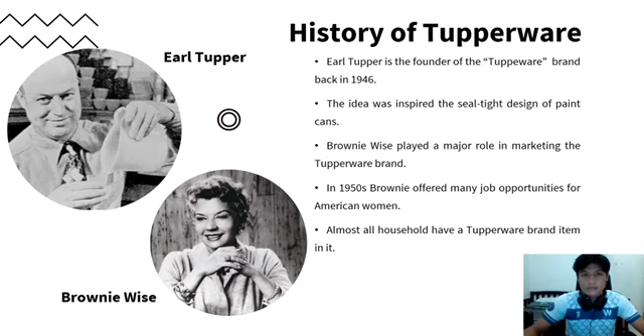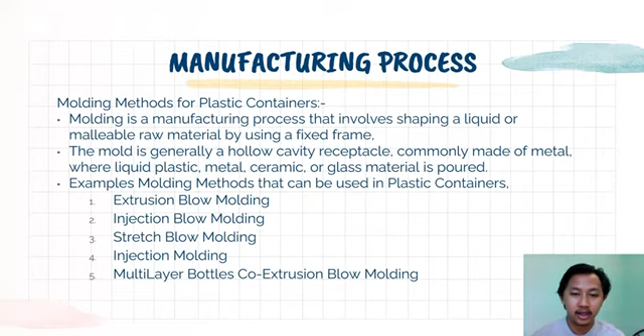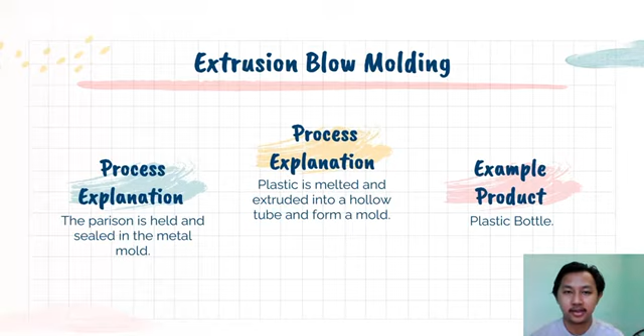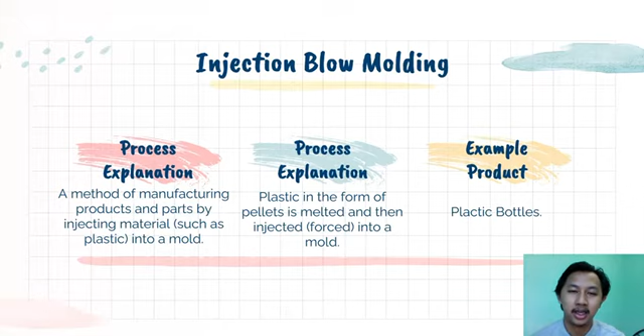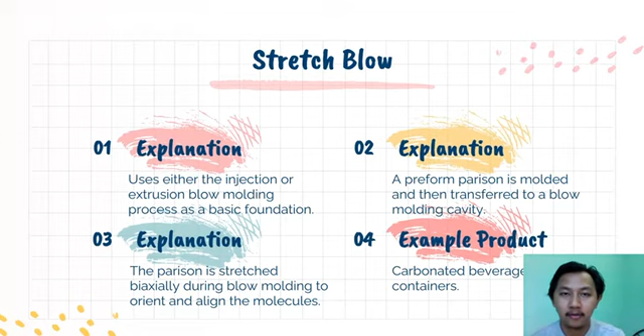Next, stretch blow molding uses either the injection or extrusion blow molding process as a basic foundation. A preformed parison is molded and then transferred into a blow molding cavity. The parison is stretched biaxially during the blow molding to orient and align the molecules. The example product that can be made from this process is a carbonated beverage container. This is the process procedure and example machine. What we can see is the process procedure is similar to extrusion and injection molding.

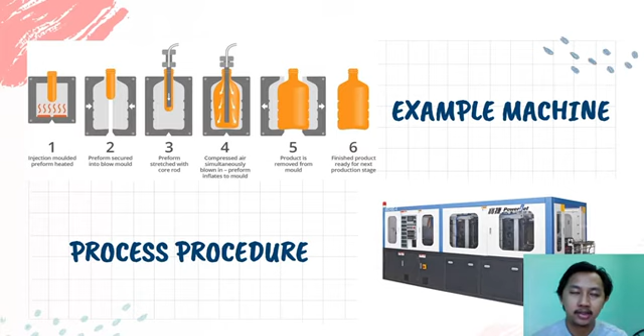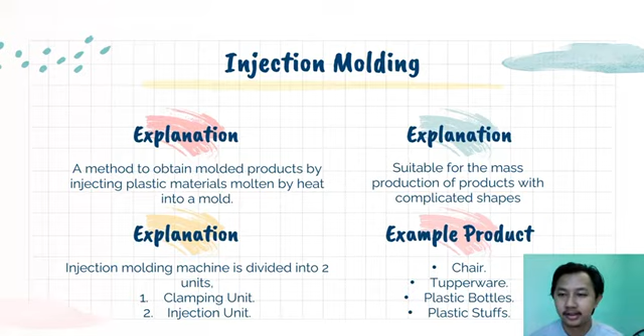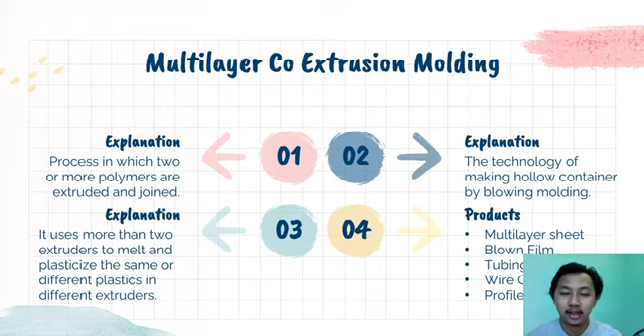So basically, for the conclusion from the manufacturing process, we can see injection molding is the good or suitable process that we should use in making the Tupperware.

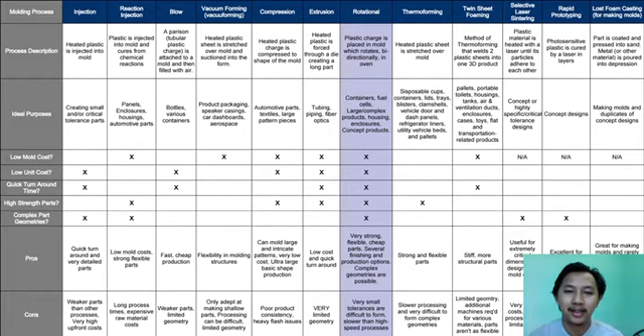Before I end my presentation, this is the comparison regarding all the molding processes. Each process has pros and cons, but we as future engineers must know the pros and cons, so we will get ready about the product that we want to make.

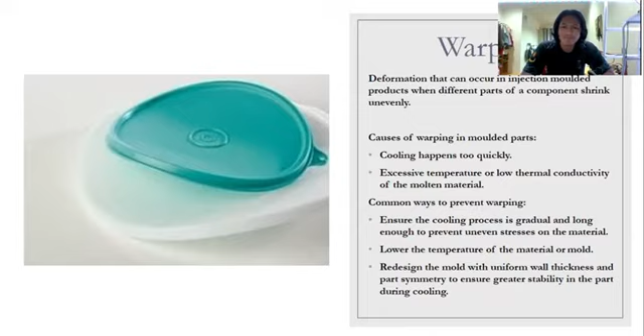So the next defect is sink mark. Sink marks are depressions in an otherwise flat and consistent surface of the molded part that occur when the inner part of the molded component shrinks from outside inward. The main cause is the material cooling too slowly, and shrinkage pulling the outside material inward before it had a chance to adequately cool.

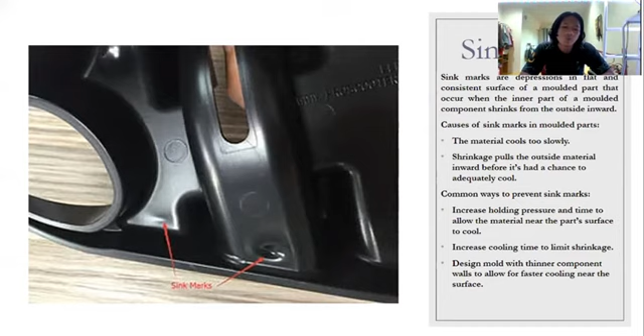The best way to prevent sink mark is by increasing the holding pressure and time to allow the material near the part surface to cool. Next, increase cooling time to limit shrinkage. Lastly, design the mold with thinner component walls to allow for faster cooling near the surface.

The third defect is flash. Flash is excess molding material that appears as a thin lip at the edge of the component, which appears due to material flowing outside of the intended flow channel. The cause of flash is a poorly designed or worn and degraded mold, and excessively high mold temperature or injection pressure.

How to prevent flash: retool or redesign the mold if the plates do not fit together properly or allow material to flow outside the channel. Increase plate clamping force to confine material flow to the channel. Lastly, adjust mold temperature, injection pressure, and ventilation to improve material flow.

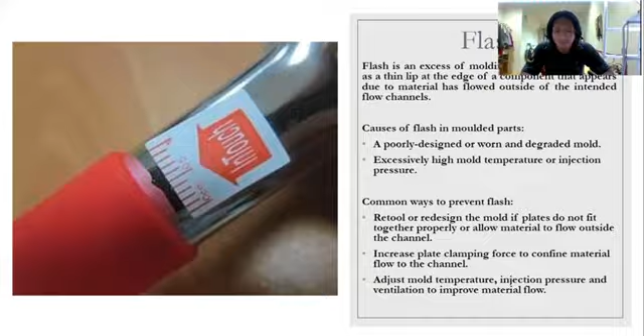Next is delamination, which is a thin layer on the surface of the molded part that easily separates or peels off the underlying material. The cause of delamination is flaky separation that results when two materials cannot properly bond to each other.

Excess moisture on the material due to improper drying prior to use can also cause delamination. The best way to prevent delamination is by increasing the mold temperature or pre-drying the material properly if excess moisture is an issue. Next, ensure workers are properly storing and handling the resin pellets or base material to prevent contamination. Lastly, consider redesigning the mold with a focus on the injection nozzle to limit your dependence on release agents.

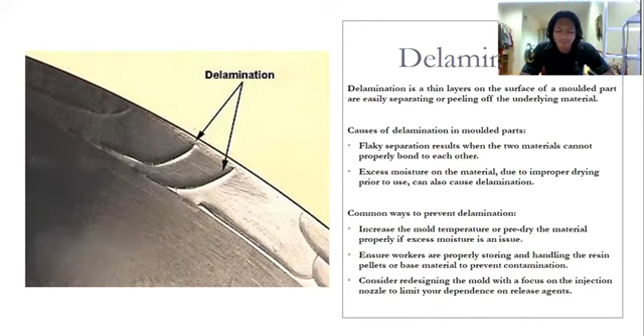The last defect that can occur during injection molding is vacuum void. Vacuum void is a trapped air bubble that appears in the finished molded component. The main cause of vacuum void is inadequate molding pressure to force trapped air out of the mold cavity.

The material may be vulnerable to void if the density changes significantly from the molten to hardened state. The best way to prevent vacuum void is to raise the injection pressure to force out the trapped air bubble. Next, choose a grade of material with lower viscosity to limit the risk of air bubble forming. Lastly, place the gate close to the thickest part of the mold to prevent premature cooling where the material is most vulnerable to void.

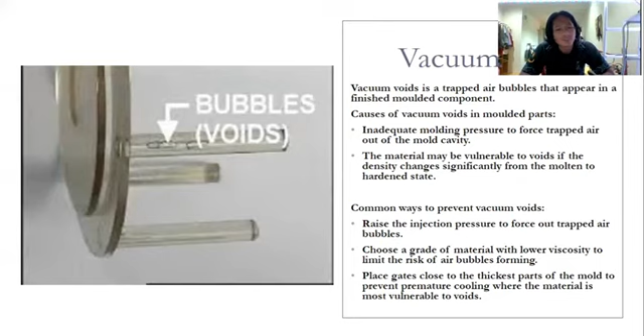Another problem faced by the Tupperware company is that customers did not know the requirements for warranty. Tupperware brands guarantee that all products are bound to receive a replacement if damaged under domestic circumstances and non-commercial use. The warranty is given against chipping that may occur along the edge of the product, breaking that produces a hole in the product, warping, and cracking that can be large or tiny.

The warranty becomes void due to stain, which does not affect the performance of the product, scratch from normal use, cut or chewing by other sharp objects, and lastly, microwave damage due to food high in sugar and fat, but which still doesn't affect the performance.

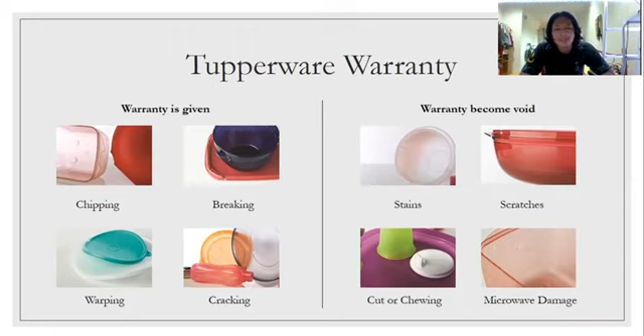The slim lunch container is the ideal solution to take raw or cooked food on the go. Thanks to its sleek design, it fits in backpacks, picnic coolers, and even handbags. With 2 compartments, 2 meals can be transported separately. Another small container with an air and watertight closure makes even the transport of sauce possible and fits accurately in the smaller compartment. The container can easily be opened with tabs positioned at the seams and on the container itself. This model achieves a partial vacuum seal, important for keeping food fresh.

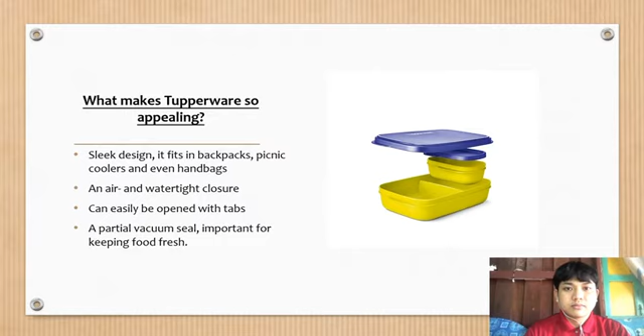Trusted for generations and designed for everyday use, Tupperware products have passed stringent tests and are built to last. They are quality products that are food grade safe, which is integral to family health. They are also designed to be used repeatedly, thus reducing unwanted mountains of garbage.

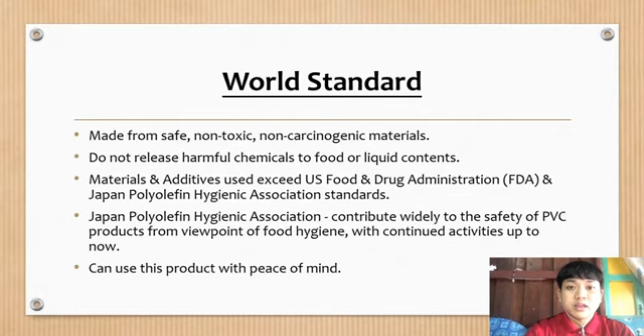World standard: to begin with, all Tupperware products are made from safe, non-toxic, non-carcinogenic materials. Thus they do not release harmful chemicals to food or liquid contents. Material and additives used exceed US Food and Drug Administration (FDA) and Japan Polyolefin Hygienic Association standards. JPHA contributes widely to the safety of PVC products from the viewpoint of food hygiene, with continued activities up to now. What it means is that you can use the product with peace of mind.

The next quality assurance is color safety. One will relish the attractiveness of Tupperware merchandise in fabulous stylish colors and be assured that the colorants used are all registered on the French positive list, circular letter number 176, which is the most stringent in the world. It published a list of colorants that can be used for the coloration of food packaging in France, and also complies with Council of Europe Committee of Ministers Resolution AP 89/1 requirement, which indicates that the colorants used in the products will not transmit any of their elements to food in quantities that could be harmful to human health.

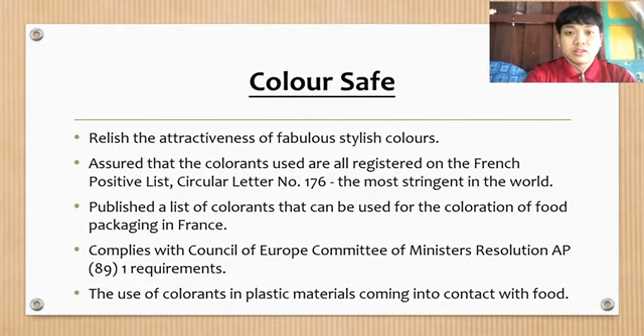The top quality and finishing is the biggest flag for this product's quality assurance. All products have passed stringent tests and are built to last. Its design and smooth finishing make Tupperware products a delight to hold and use for any occasion. The high quality and standards are reflected in its typical single product mold.

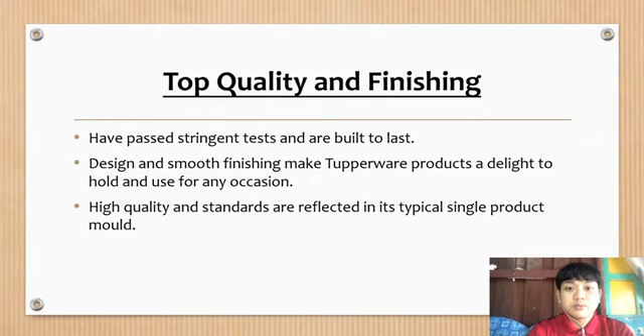Another pertinent quality assurance is its innovative design. Tupperware products are designed to inspire. Unlike ordinary plastic products, many Tupperware products have won worldwide awards such as the Industrial Design Excellence Award, Red Dot Award, iF Seal Award, and numerous others. All these awards acknowledge Tupperware as products that combine dazzling beauty and exceptional functionality. Indeed, one can use Tupperware with pride.

Microwave safe is where Tupperware products are indicated for microwave use. Tupperware's microwave safe storage boxes are all safe for reheating and won't warp or melt. Tupperware uses materials strictly meant for microwave use and adheres to that standard.

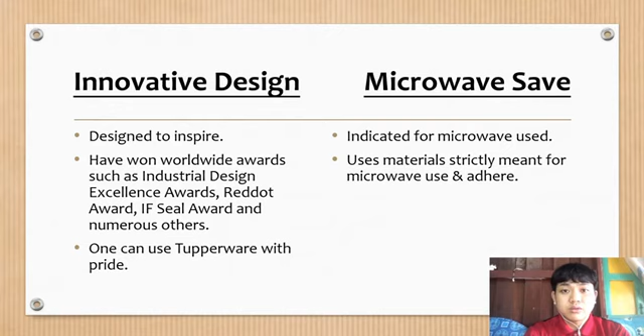Lastly, environment friendly is definitely a major quality assurance for the product. Tupperware plays its role in saving Mother Earth from further pollution and degradation, as its products are designed for long-term use. On the other hand, plastic bags and bottles, styrofoam containers and PET bottles are not meant for repeated use, and thus add to the mountain of garbage. Tupperware products can reduce wastage as they can be used repeatedly.

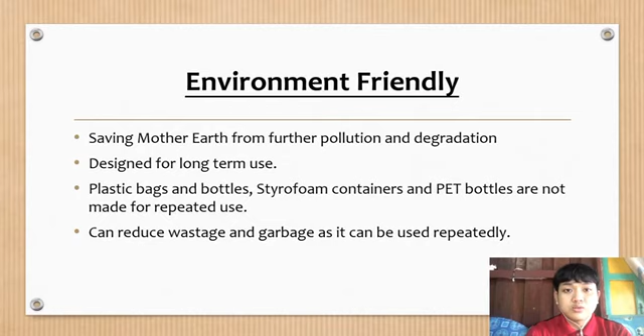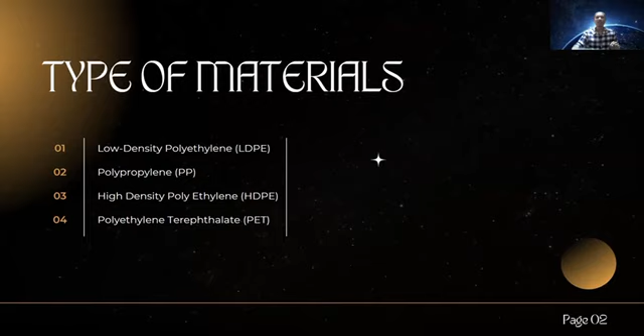There are a few materials used during the production of the product, such as low-density polyethylene (LDPE), polypropylene (PP), high-density polyethylene (HDPE), and polyethylene terephthalate (PET). These materials are chosen based on their characteristics.

First is low-density polyethylene (LDPE). It's a soft, flexible, lightweight plastic material. LDPE is known for its low temperature flexibility, toughness, and corrosion resistance.

Then polypropylene (PP). PP has high flexural strength due to its semi-crystalline nature, has a relatively slippery surface, is very resistant to absorbing moisture, and has good chemical resistance over a wide range of bases and acids.

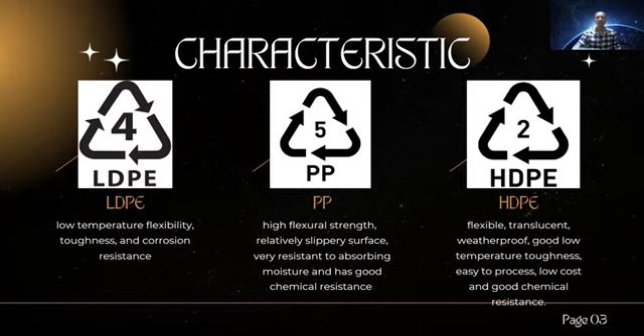Next is HDPE. HDPE is known as flexible, translucent, weatherproof, with good low temperature toughness down to -60 degrees Celsius, easy to process by most methods, low cost and good chemical resistance.

Lastly is PET. PET is known for its transmissivity, shatterproof quality, strength to weight ratio, and chemical resistance.

But most Tupperware plastic products are made using two materials, which are low density polyethylene (LDPE) and polypropylene (PP), because these two materials are considered safe for repeated use storing food items and cycling through a dishwasher.

There are many different processes for manufacturing plastic, such as injection molding, plastic extrusion, and blow molding. What are the fundamental distinctions between these various plastic production processes? Here is an example of a quick comparison.

For plastic extrusion, plastic powder or pellets are fed into the extrusion machine via a hopper. A screw pushes molten plastic through a metal die, which is then cooled to give the plastic a fixed, continuous shape while being continually pushed and molded into the final shape, while the polymer is heated within a barrel at a controlled temperature.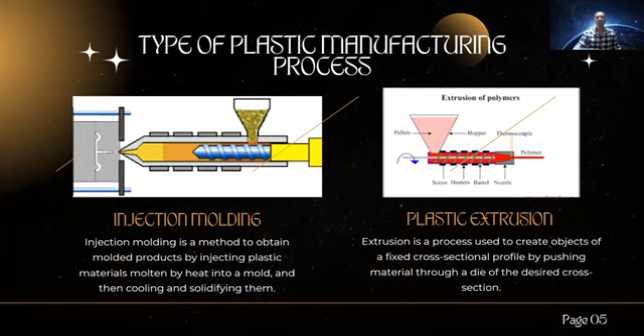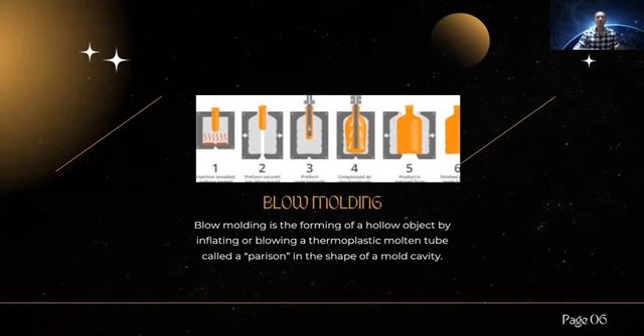And for blow molding, air pressure drives the hollow plastic to expand into the mold or extrusion shape, leaving the interior of the product hollow, similar to the plastic extrusion and injection molding process.

Injection molding prototypes are both an art and a science to create. When it comes to mass production of unique parts, a high level of technical competence and attention to detail are necessary to avoid little mistakes costing the company a lot of money. High quality design is essential for avoiding such situations.

Here are a few preventions for a company to minimize losses due to defects of the product.

For flow line defects, increase injection speed and pressure to the optimal level, which will ensure the cavities are filled properly while not allowing the molten plastic time to start cooling in the wrong spot. The temperature of the molten plastic or the mold itself can also be elevated to ensure the plastic does not cool down sufficiently to cause the defect.

For sink marks, mold temperature should be lowered, holding pressure increased, and holding time prolonged to allow for more adequate cooling and curing. For vacuum voids, locate the gate at the thickest part of the molding.

For burn marks, reduce injection speed and optimize gas venting and degassing. For weld lines, raise the temperature of the mold or molten plastic and increase the injection speed.